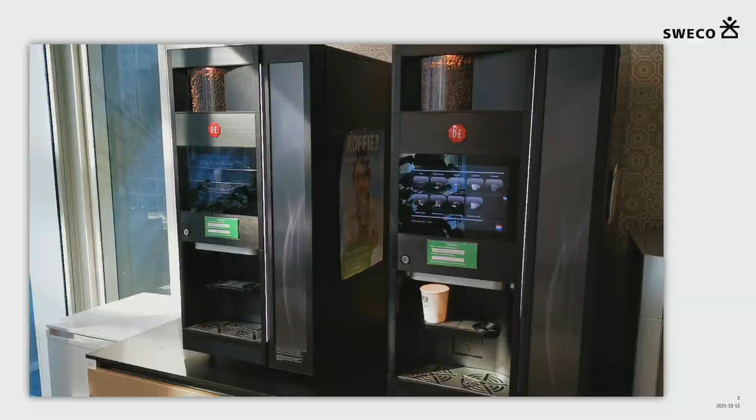Maybe it's interesting. I always explain people what I do with this coffee machine, and you will all do similar things as me. I think it's for you also a good introduction of how do you explain what you do.

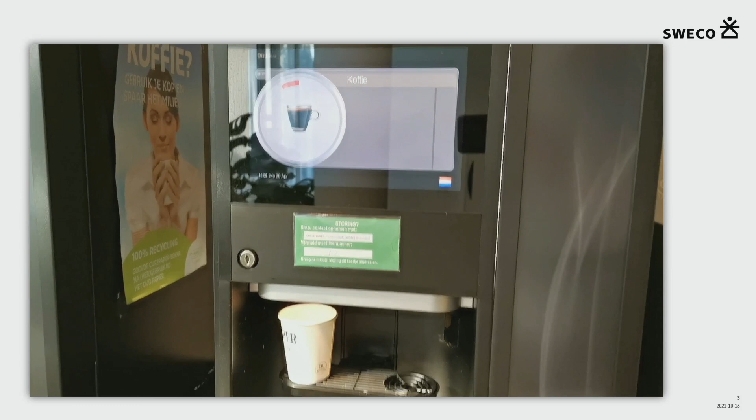Basically what we do is we design this black box. People have a user interface, they can change parameters, put a different strength of coffee, of sugar. All of this happens in the interface, and we design everything that's in the back. We make sure that this coffee comes out. In general, if you program it right, it will work, and if there's any mistake, it's a human mistake.

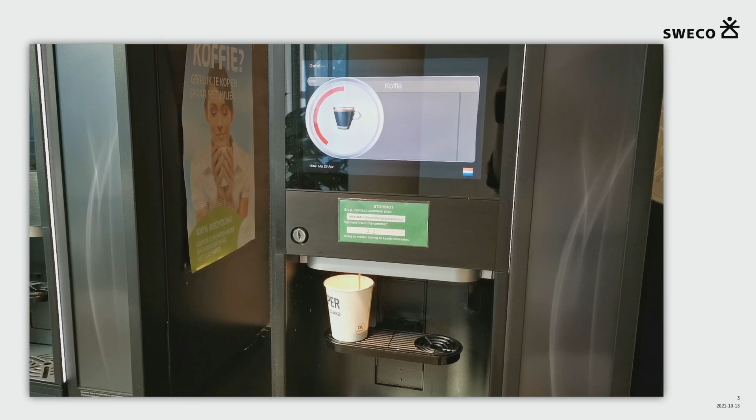And there's also something here. This machine, for instance, doesn't put those little spoons, so I was going to do that myself. And I'm terribly at multitasking, so you can see a human mistake is very easily made.

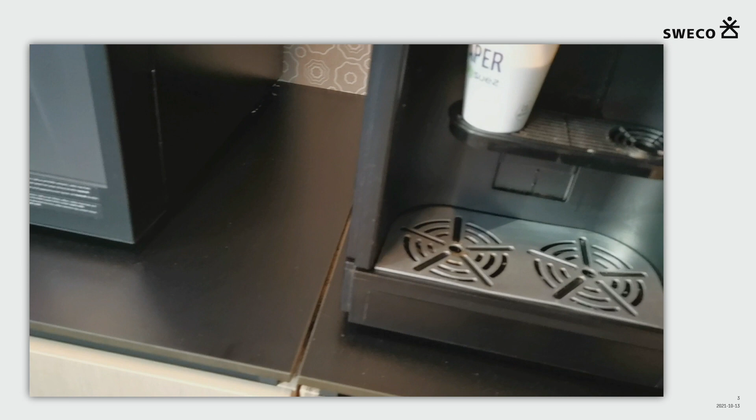And then a bit about Sweco. Who of you already knew Sweco before this CodamX talk was initiated? I see one finger. Well, we are actually Europe's largest architecture and engineering consultancy firm. We have about 17,500 engineers, architects, and consultants. Sweco stands for Swedish consultants, so a third of our people are actually in Sweden, and about 10% of all of the engineers and architects are in the Netherlands.

And to give a bit more overview of what we do, there's a video. I'm going to move with that one now.

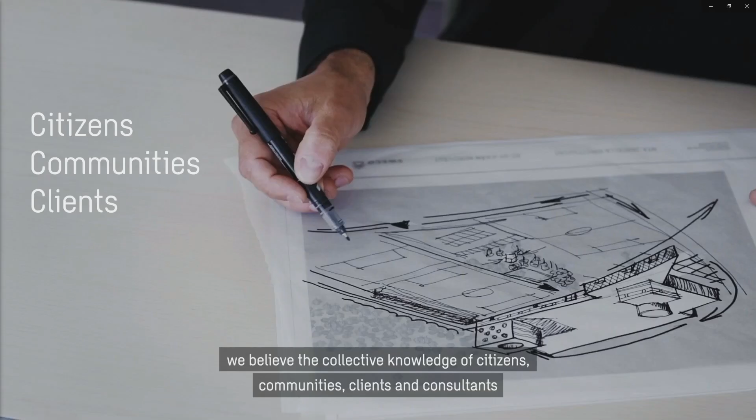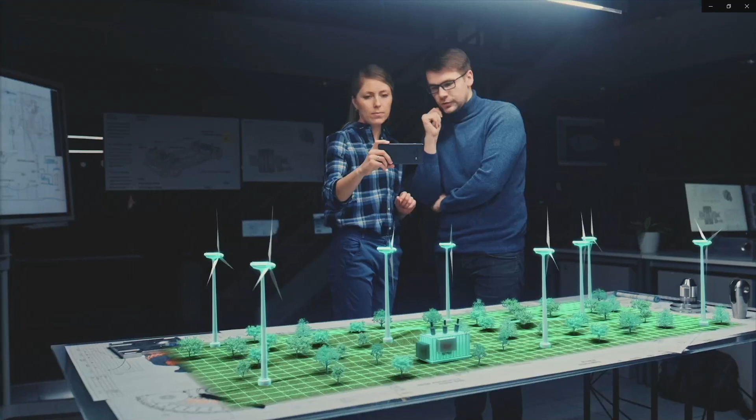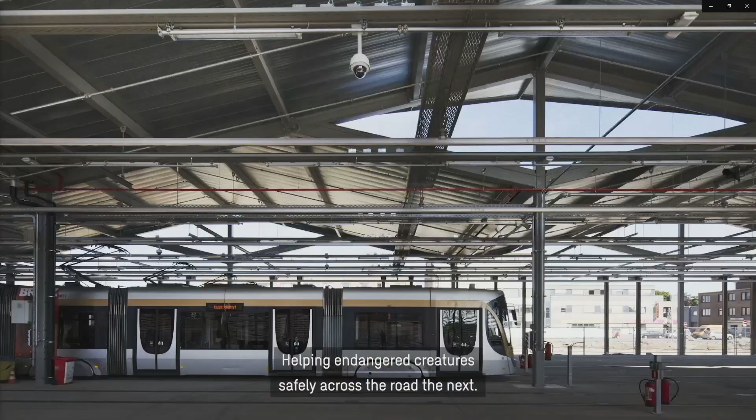Can't see it. Society. Transforming it is the most necessary and inspiring challenge we can imagine, and one Sweco is proud to rise to. Every day since 1958, we've been combining different perspectives and expertise to solve the most pressing challenges of our times. While those times have changed, the Sweco philosophy hasn't. We believe the collective knowledge of citizens, communities, clients, and consultants creates solutions that truly stand out and truly transform. You won't find us on the sidelines looking in. We're right here. In the midst of society's most seismic shifts and trends, we stand shoulder to shoulder with clients and communities, facing and transforming all our futures. Together we're addressing urbanization. Together we're capturing the incredible opportunities of digitalization. And together we're making everyday living ever more sustainable. That might be creating new careers in the world's greenest office building one day, helping endangered creatures safely across the road the next. Wherever transformation is needed, we're there to lead it, ever fueled by the insight, diversity, and scale of being the leading player in Europe and a strong local presence for focus, agility, and proximity to our clients and society's needs. In our ever more complex world, each Sweco consultant has the expertise, determination, and responsibility to solve the challenges of today with concrete results that spark new realities and transform tomorrow for all of us. Together. Sweco. Transforming society together.

Yeah, so transforming society together. We want to be close in the local business areas, and we want to challenge some challenges that we have to resolve together with our clients and together with communities.

And we have 6 important themes in that, and we call them Urban Insights, which is our international knowledge program. So we also work a lot together cross-border with other countries within our Sweco Group.

And so we have, for instance, climate adaptation. We need to get our urban areas, and also all of the other areas, ready for the new changes in the climate. Circular economy: materials are scarce, they're not endless, so we need to be smart with them. We need to design our buildings so we can take them apart later and reuse them in different buildings later on. The energy transition: of course, we all want the renewable energy resources.

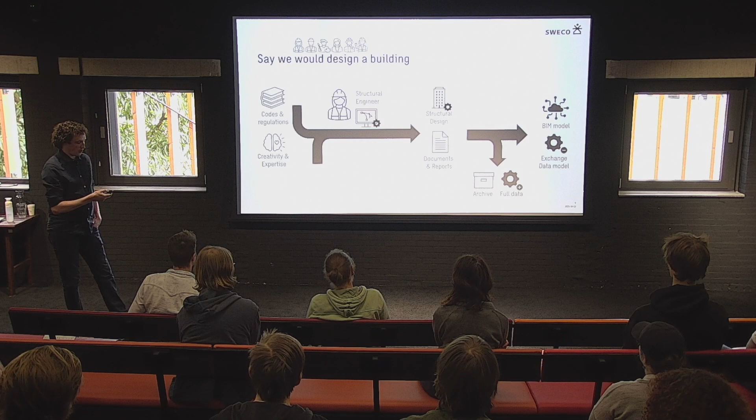You will also have reports with the results. To work together across disciplines, we take an extract of the structural design and put it into a BIM model, so there's a lot less information stored in there, and the real full information is stored in the archive. So the full data will be archived. Through this BIM model, we can collaborate, identify clashes, see what things we need to resolve together, and this loops over several times.

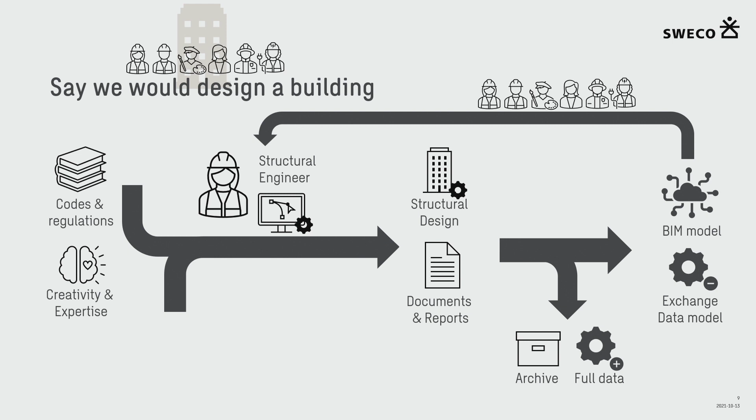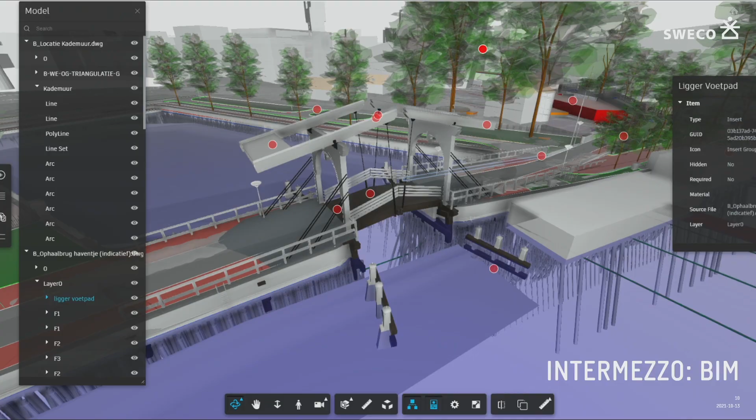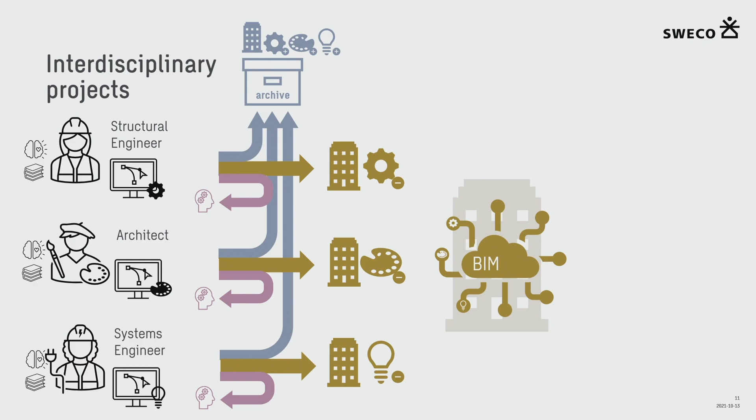So if you have multiple disciplines - I mapped here the data streams that we have, and you can see most of it ends up in the archive. It will be stored in a project folder and later archived away. What is left in the BIM model is basically the abstracts of each discipline, just to be able to interact. Another data stream we shouldn't forget is the experience gained by every engineer, which goes back into the heads of the engineers and consultants.

And what we actually want to do is centralize all of this data, all of this experience, and put it into a digital twin. The digital twin is a bit different from the BIM model, as you can keep it up to date with the building. So say you would move a wall because a room needs a larger floor plan, then you would update it in your digital twin.

And what we should start doing is making digital twins of all of our buildings and storing all of our archived information and our experiences in there. Because that opens new opportunities for us.

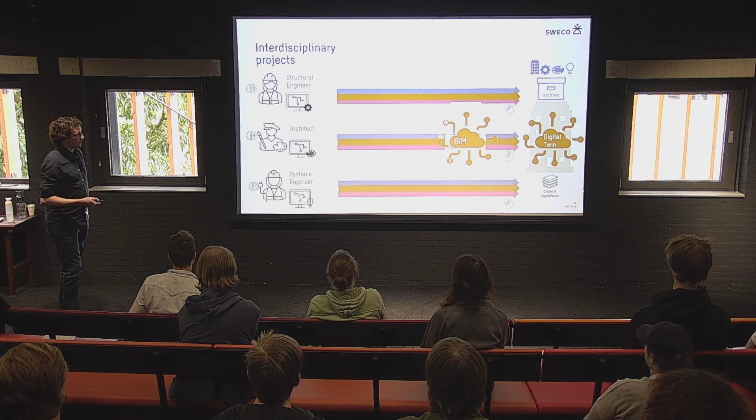You could, for instance, connect it to Internet of Things. You can start monitoring, doing all of your maintenance there, and then you have asset management. But most importantly, you are collecting data, storing data, and this can be very valuable for all of the consultants again.

So say the ventilation system in a design is working not optimal, and we store this data, we get the monitoring, we get all of this data. We can learn from that and take it into account in the next designs.

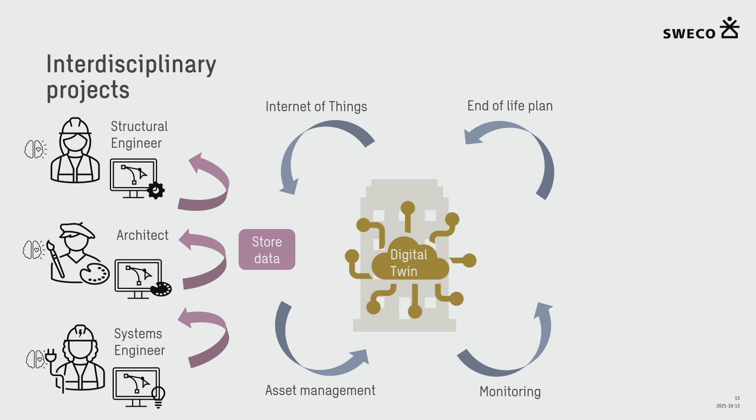So the vision is to end up with a life cycle of data, where from initiation you start with data collection and keep on building on top of that. Most of the data will probably be generated in asset management where you are doing the maintenance - it's also the longest period of time of an asset, the use time of the asset. Then we have the end of use, which, since we want the circular economy, this data can be used for new project initiations.

So how do we capture this data and maintain this data? Well, that's where you come in. We will need new roles in our industry. We will need new disciplines to change the status quo.

I defined some of the roles here. For instance, we need a data architect, someone that makes the blueprint how to store this data, and the policies and the governance to do this data collection. A data engineer to carry out this blueprint, to make the pipelines that process the data, and then data scientists that create new overviews, new data insights with predictive models.

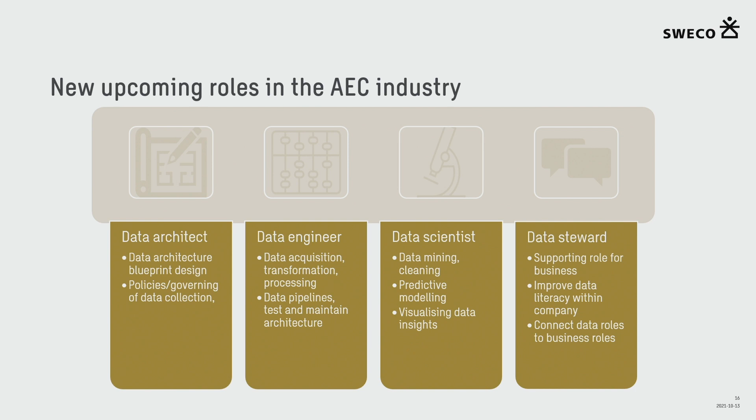As we also need a connection with the status quo, the people that are now working in our company, we need a data steward to improve the data literacy and to see what are the things that it can help you with, basically.

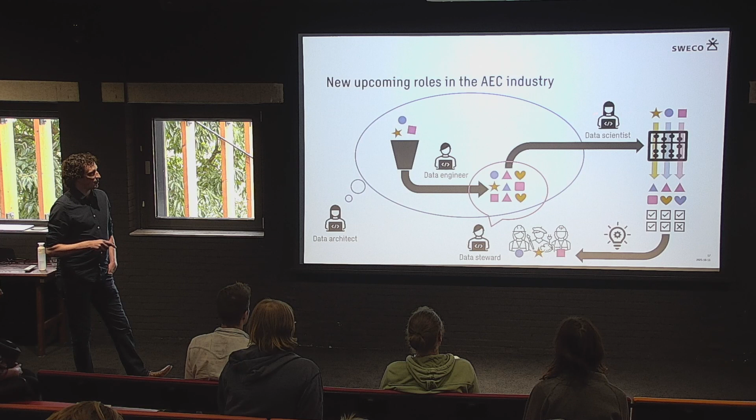And I made this sketch as well, so you can see the data architect thinks of the blueprint, and the data engineer makes these pipelines. So you have these different data sets from different disciplines, and this pipeline basically structures it and gives it some extra metadata, which then the data scientist can take out of a data lake and make new predictions that are new insights for our engineers.

And the data steward then explains the importance of all of this. Why is this helpful for us? And why are we storing our data as we are going to do that now?

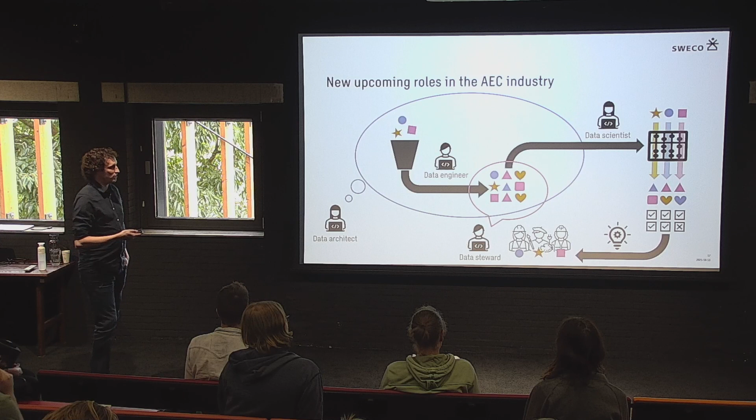So now I would like to go into some practical examples. I earlier showed you the urban insight teams, and they all touch upon it. They all touch upon digitalization, of course.

The first one is solar parking, which is relating to the energy transition. And there we wanted to kick off a project and to test the feasibility with as much insights of as much possible disciplines as we could. So I will go further into that later.

Then we have the master connection, which centralizes our own knowledge into predictive tools. And Reclaim is also focused on the circular economy, and it is made to sort of bring out the data that we already have.

So we have the life cycle of data as a vision for the future, but a lot of assets, they are already built. They don't have this data structure at the moment. So we need a solution for that as well.

So for solar parking, we wanted to, in the energy transition, we have those fields that are covered with solar panels. And instead of doing that, we want to cover parking spots. And to do so,

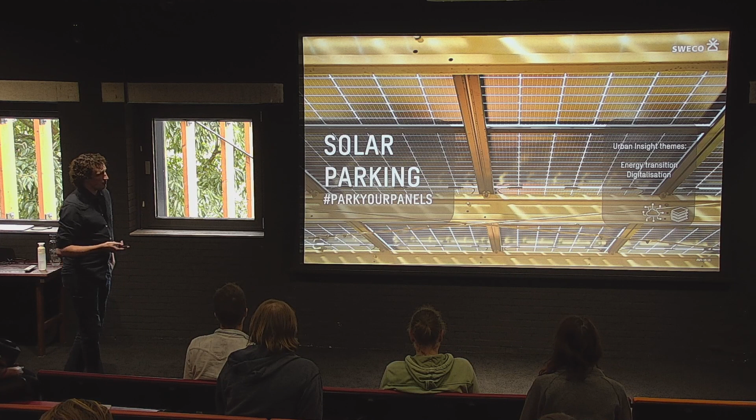we sort of wanted to kick off by integrating as many disciplines as possible. And it seems a simple design, but there's quite a lot of expertise involved.

For instance, you need a parking consultant, which calculates the amount of parking spots you can have, makes the design of the floor plan of the parking spot, of the parking location, the structure engineer to design the structure, a cost consultant to calculate all the cost, the solar power consultant to get the solar gains, which is where you can make the money from the energy you get, and the financial advisor of the feasibility.

So normally we would do this project with among others, with these disciplines. And we added that digital integration team and the GIS services. And I have a small video now to show the tooling that we made.

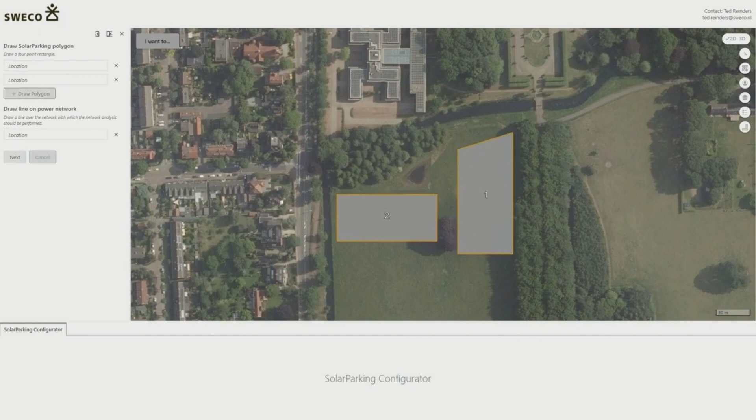So this is our GIS system, GeoWeb. It's a product of Sweco, and we have our own developers working on that. And when you use this tool, you can draw in your own parking location. And this is important because the location determines the solar gain you get and the orientation as well.

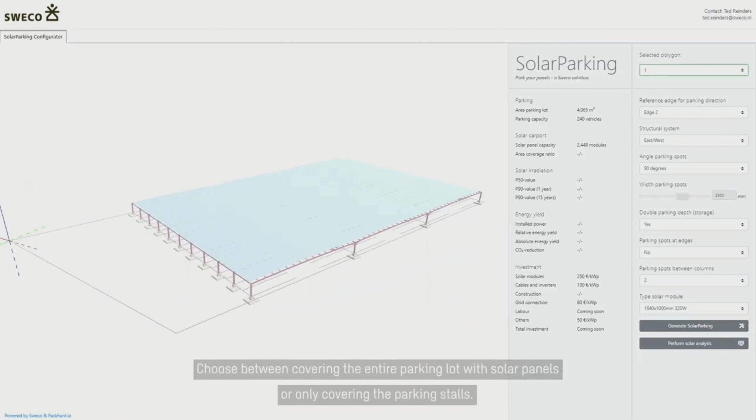Then it goes to our parametric configurator, where basically, according to all of the rules that we programmed, it will give you a primary initial design. So you can, with the parameters, you can tweak them a little bit. And always there will be a verified design coming out of it.

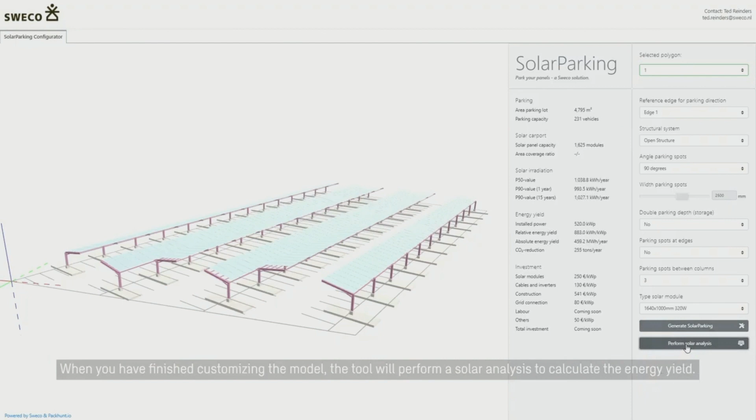So these are all designs that you could make with this configurator. And now we can also perform a solar analysis. So we can calculate the gains. So then we know what kind of cost efficiency we will get if we would make a solar park in this location. So we use this for the initial phase, the feasibility.

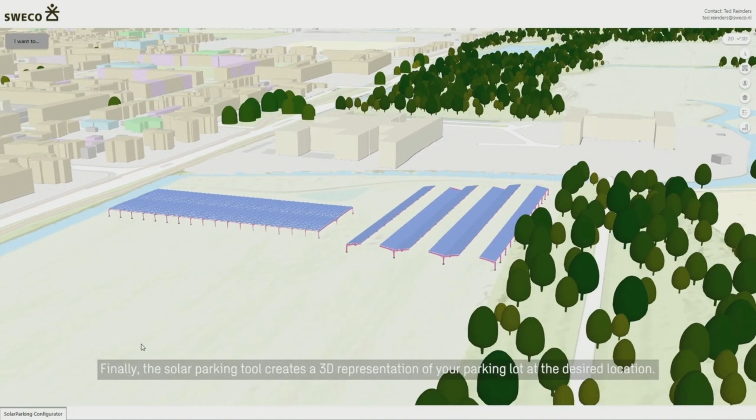And if it's feasible, then we can kickstart the project very easily, since we already structured the data in such a way that it's verified and validated. And there we put it in the location for the client to see how it will look in their area.

Like I mentioned before, the network connection infrastructure is not everywhere ready to connect a lot of solar panels into it. It's actually becoming, at least in the Netherlands, quite a thing. I've seen it in the news multiple times in the last few weeks. So we need to upgrade the network as well, and this can be a bottleneck for any project, and therefore also the feasibility.

Then we also still have the safety aspects, and the installation design is not included yet. If you have large areas, you also need to think that the fire department needs to be able to get there. So those things need to be included as well.

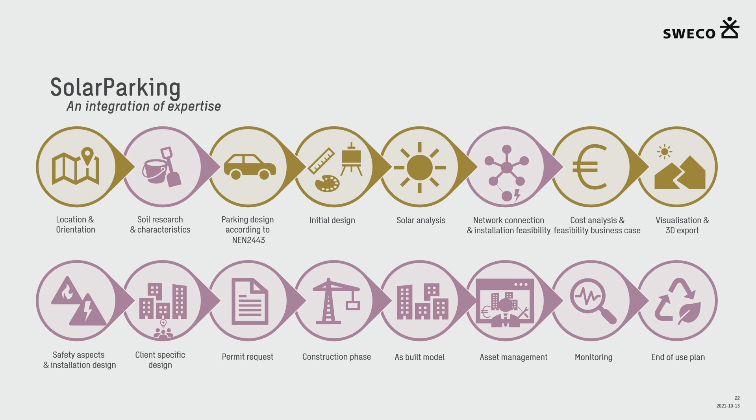So within the vision of the life cycle of data, these are the first steps of project initiation and design. Starting to build your data as you can use it in all of the other stages later ahead, and you can enrich and build further on top of that.

Another example I would like to show you is the MasterConnection. I can only show you a prototype made in 2019 in Finland. It's still in development, but this is what we can share at this moment. And it focuses on these kind of steel structures.

About 10% is sort of unique, so a lot of them you can repeat. So you can copy-paste a lot of work as well, but still every unique one you spend 10 to 30 minutes on.

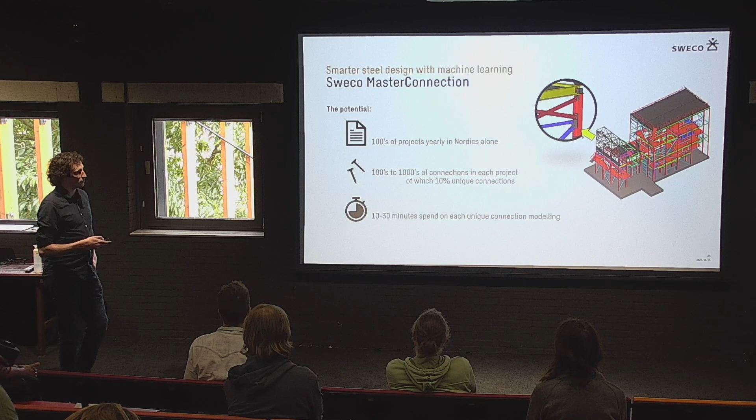So what they want to do is some sort of information sharing platform. That's what the prototype did.

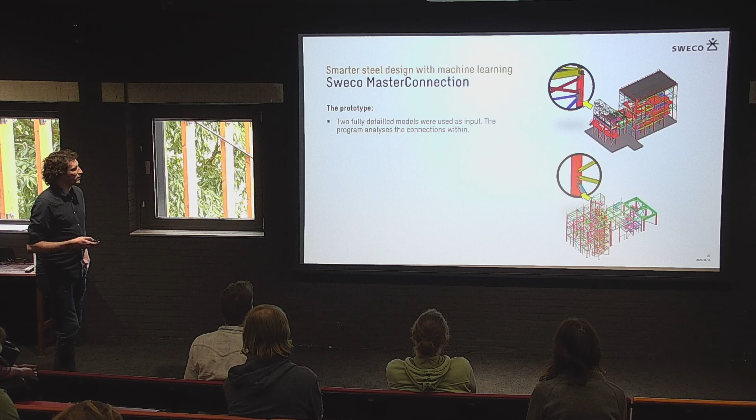The prototype was made with two fully modeled, fully detailed models. So it has all of the connections already in there, validated. And then it had a basic model with no detailing at all.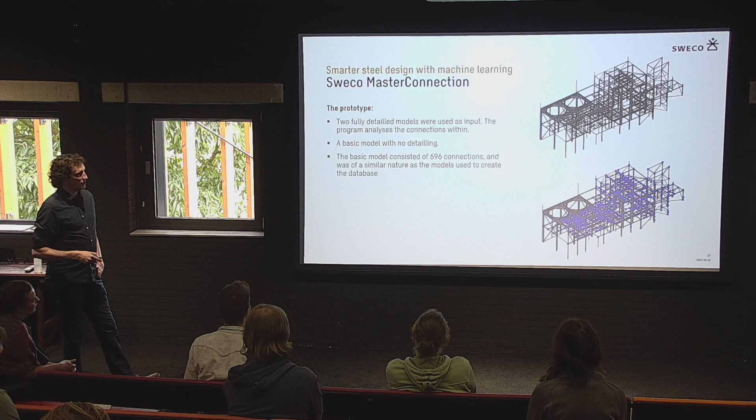So what the program did, what they designed, it sees where elements are intersecting, and then you know there should be a connection there. And in this case, there were 696 connections.

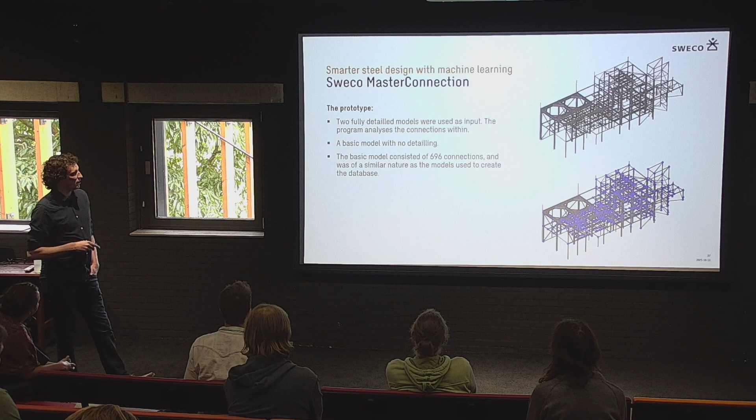And then from the database you created with the other two models that were fully detailed, with some nearest neighbor algorithms, you can define which ones are a perfect match, which ones are possible matches, and some are no match.

So this overview, for instance, is already very useful, because when you start a project, you know how much time it probably will take to design this whole structure.

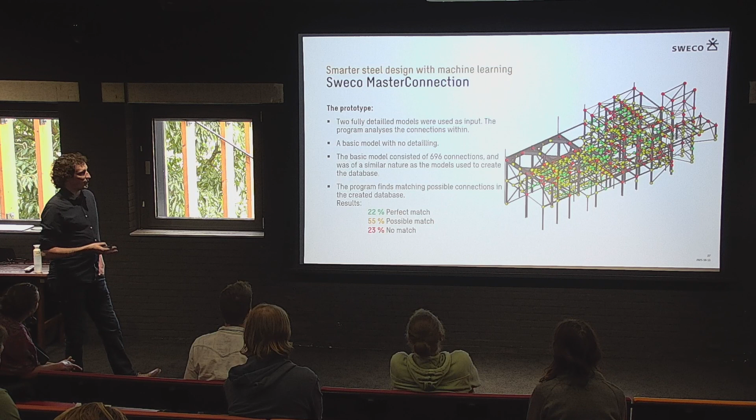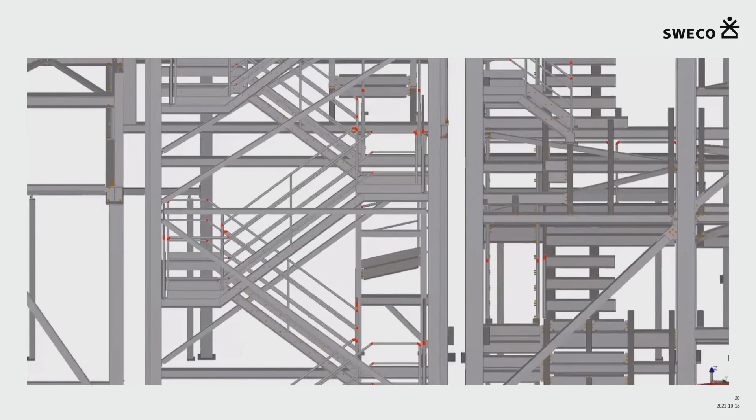So I have a little video here as well to show it better. So this is a model that's fully detailed. We will zoom in soon. And you can see all of those red dots, all of those orange dots - those are detailed connections, connection details that have been modeled already.

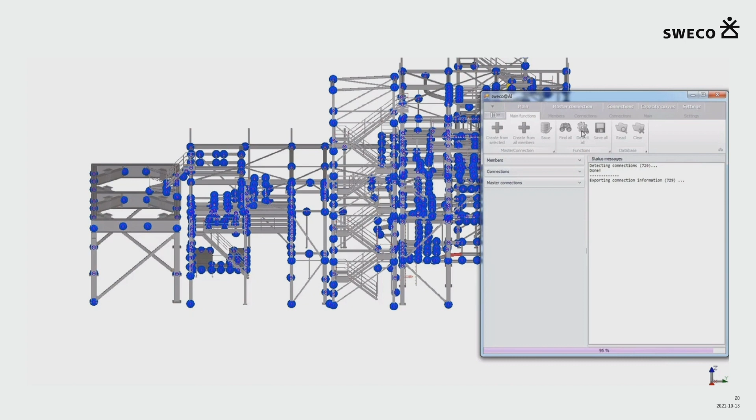So first it looks for where members are joining - those are those blue spheres. And then it collects all of the detailed information into the database. And then we get a model with no connections at all, and we do that first step again. So everywhere where steel beams touch, we know there should be a connection there, so we get the blue spheres again.

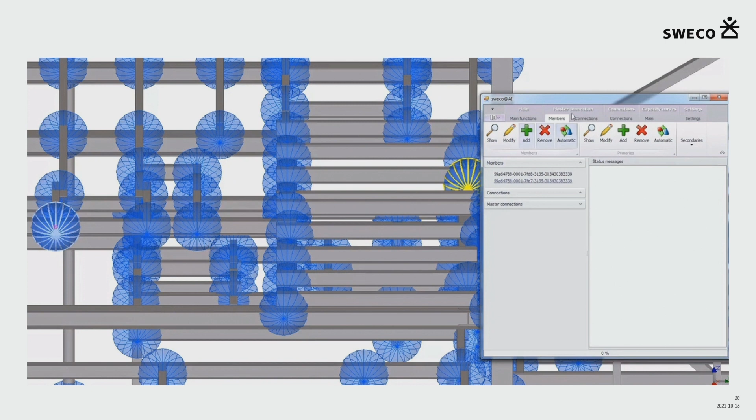And now for each of these spheres, we can ask for a prediction. So if we zoom in, then we can select one of those spheres. And it can ask the database, okay, do we have something that fits these properties of the connecting beams? And in this case, it finds 100% accuracy. So you could then directly put this detailed model into your project.

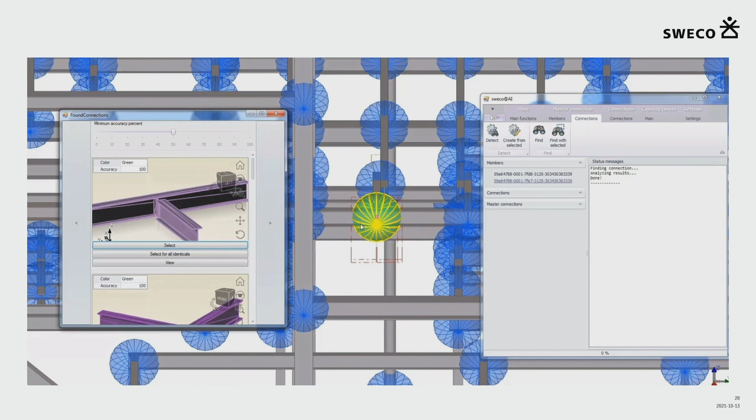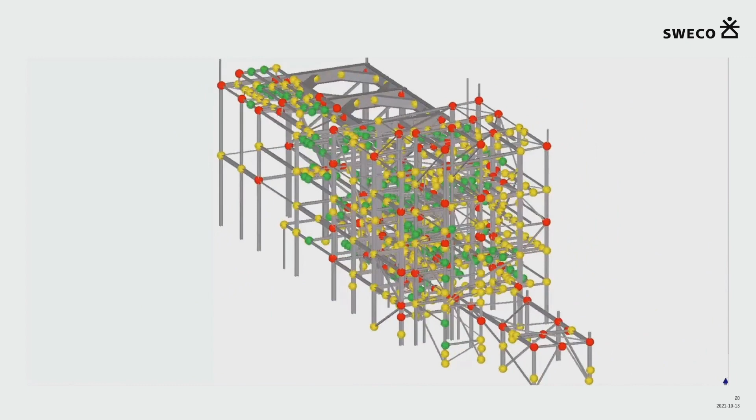And you can also select for all identicals, because it's often repetitive. So it's directly modeled into your design. This is a huge game changer, because if you imagine hundreds of projects, you can store all of this data. You will get smarter with every project you do.

And of course, a structural engineer needs to validate and understand exactly what's happening there. So we will get early insights into how much work it would cost. And we accelerate our own processes. And somehow you also get some sort of uniformity across all of your projects.

And in the future, you could add integral recommendations. Say you would add the cost of each connection or the carbon footprint of each connection. Then you can decide, because multiple connections can be a correct choice for adjoining beams. So then you can choose based on cost or carbon footprint, for instance.

And you can start monitoring the use of what our own engineers use a lot. And you can maybe upvote or downvote for certain reasons. For instance, if a connection is valid, but it is very difficult to make in a structure, you might want to downvote it, because we would not like to use it again, since it takes a lot of time on the construction site.

So how does this change the status quo? Well, if we integrate multiple disciplines in this kind of tooling, first of all, we get smarter with every project. But all of these disciplines can then have a profit of it, let's say. So, for instance, the cost estimation, you can just take it out of your database because you know everything is structured.

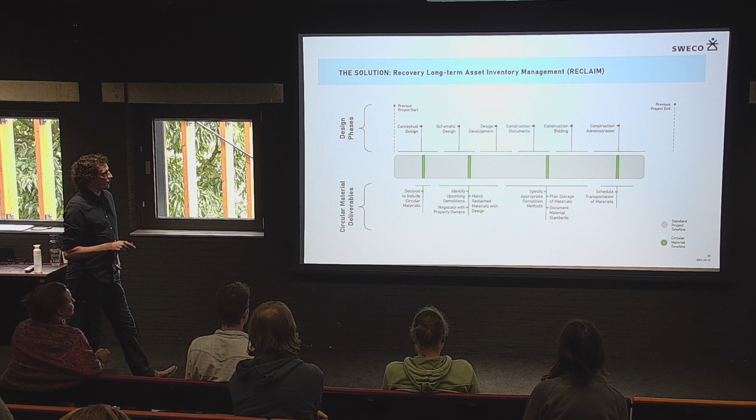So normally you have a design process like this. It can take quite some time to design a new project for, say, a high-rise building or something. But for the materials, you have a very small window of opportunity because you don't know where they will occur, or where you can get the circular materials. Our vision is that if we can predict which buildings will be demolished, then we can ask those asset owners what kind of materials are there, and whether it will be demolished soon. Then, in every phase of our design, we can implement parts of the circular materials and time the demolition with the construction of the new building.

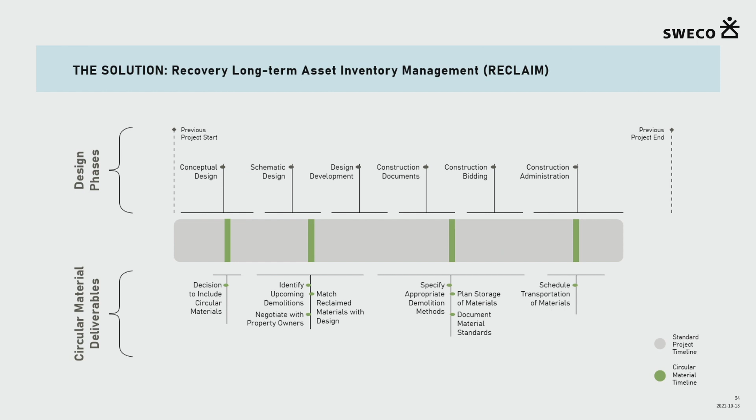And the prototype, built by a data scientist, was based on a data set of the city of Rochester — I'm not sure if I pronounced it correctly — but it's a city in the United States, and they have an open database. So you basically plug in the data from 2012 and 2021, and with this data, build a machine learning model to predict which buildings would be demolished in the future.

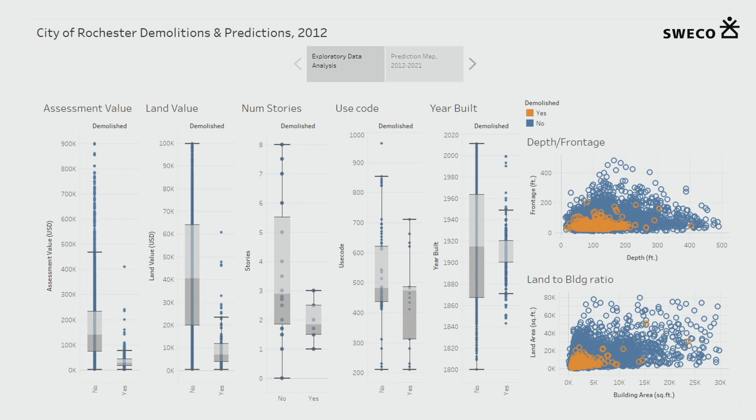We show this data as well. The assessment value of an asset was quite important - most demolished buildings actually had a very low assessment value compared to all buildings in the data set. The same applies for land value. So you can already see the pattern that the machine learning model also picked up.

So what does this change compared to the status quo today? Since a lot of these assets already exist in the world, they are not yet included in our life cycle vision. In the end-of-use phase, we can now start including existing unstructured data, and in the project initiation phase we can have insights into where we can get materials, where we can make a change, and where we can boost the circular economy.